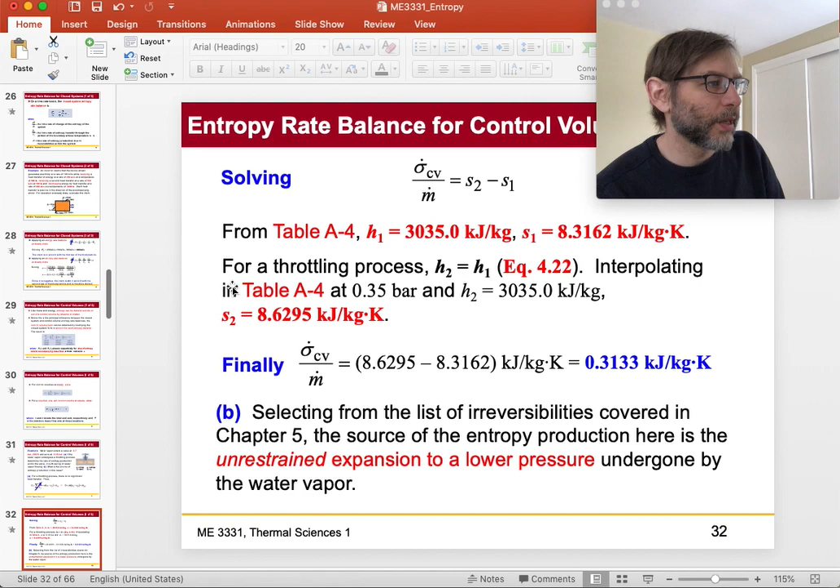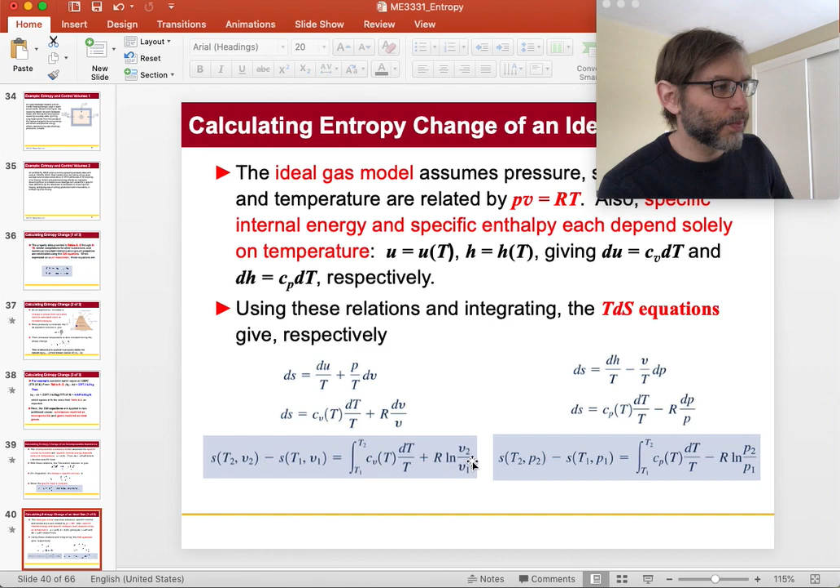Entropy change for an incompressible substance—you recognize this equation. You might recognize these equations, the Cv dT over T, R ln V2 over V1, which is an example I gave you on the homework assignment. This other one, also for an ideal gas, Cp dT over T, R ln P2 over P1, the pressure correction factor—you've used this before. You've also seen this one, the S naught. This was also in the back of the slides and something we've already used.

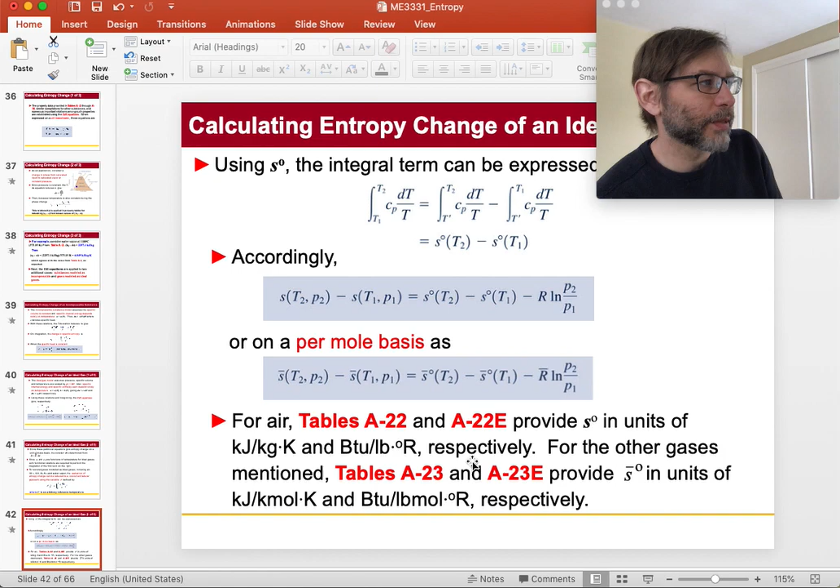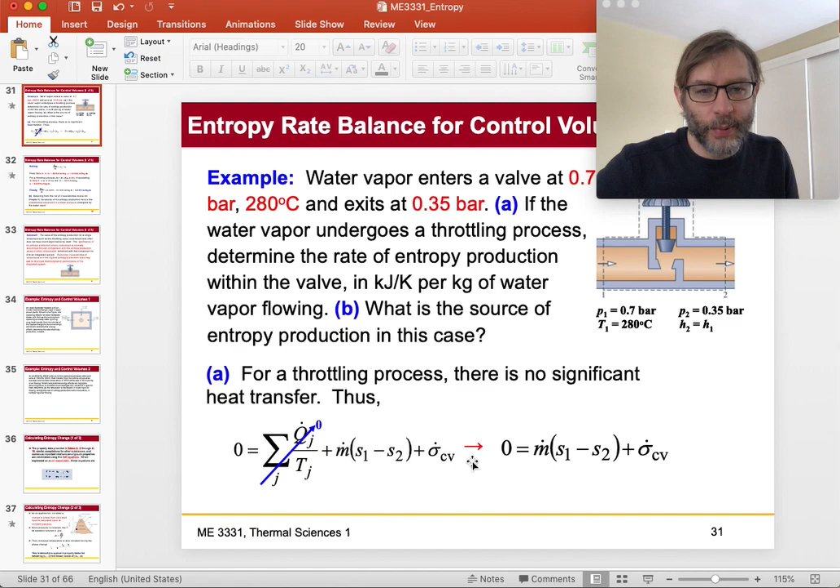So what I'm saying is the rest of the slides really aren't that new. There's some new stuff we will cover, but I'll just blow through them in Wednesday's lecture. Today, the most important thing we cover is the entropy rate balance for a closed system and for a control volume. It's not that difficult to extrapolate what we've been doing for closed systems into control volumes—not a huge leap.

On a time basis, we start by putting the entropy equation, or entropy balance, into a rate expression, just by saying dS/dt—dividing everything by dt. So big dS/dt is equal to the sum of the heat transfer rates, Q dot J, in kilowatts, over some temperature at which those heat transfer events occur on the boundary, plus sigma dot, which is the rate of entropy production—the entropy generation of the system.

Production of the system going out to the environment — that's the time rate of entropy production due to irreversibilities within the system. So this is the rate equation.

It's very similar to just the non-rate equation, it's just divided by dt, because the q dot and the sigma dot are just the rates in and out of the control volume.

So here's just a simple example, entropy rate balance for a closed system. This is an example that's in the slides that you can work through yourself if you want.

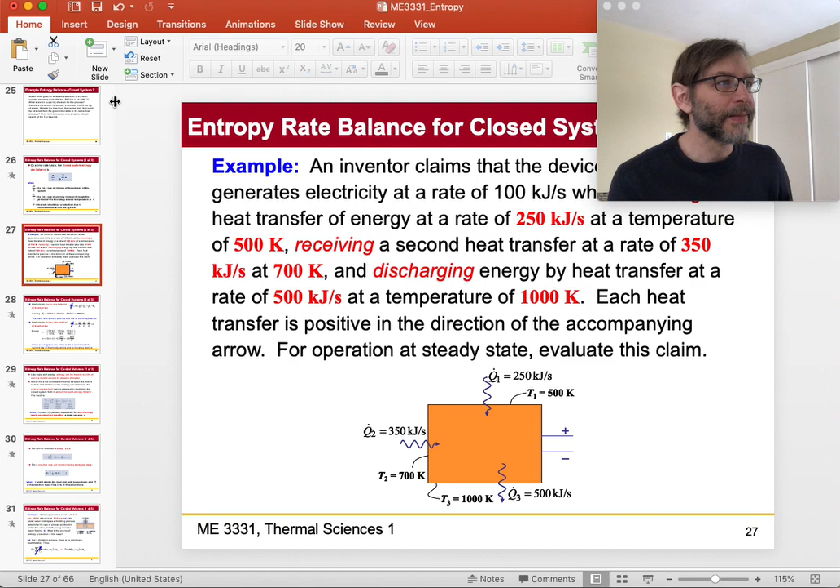Each heat transfer is positive in the direction of the arrow for operation at steady state. Evaluate this claim. Essentially what they're trying to say is that the device this inventor has created generates 100 kilowatts of electricity by receiving and rejecting some heat.

First off, you have to think to yourself, if you're the patent examiner looking at this, you go: well, okay, so the box takes heat in, rejects heat, and also produces work. So you'd say, just from the outset, it doesn't violate the Kelvin-Planck statement, right?

Everything is fine - well, I wouldn't say that it doesn't. You can't really say that it totally violates the second law, but it doesn't violate the second law in principle. It certainly doesn't violate the first law, and you can check that.

You can check that because you have all the heat streams. Just from the top of your head, we can look here and see that it's 250 kilojoules in, 350 kilojoules in, so there's 600 kilojoules per second - 600 kilowatts of heat going into this magic device, engine, fuel cell, whatever it is.

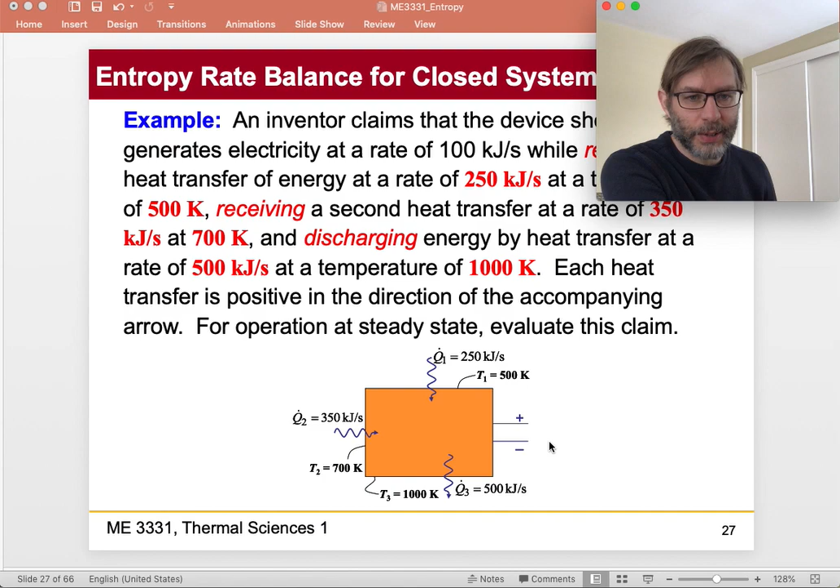So now we want to evaluate whether this system is possible based on the second law. Okay, let's do it. So entropy balance for the closed system.

Now we're going to do the energy balance, and clearly this is in accord with the first law of thermodynamics. We already talked about that, we did that in our head so we didn't need to write it down. It's clear that it all works.

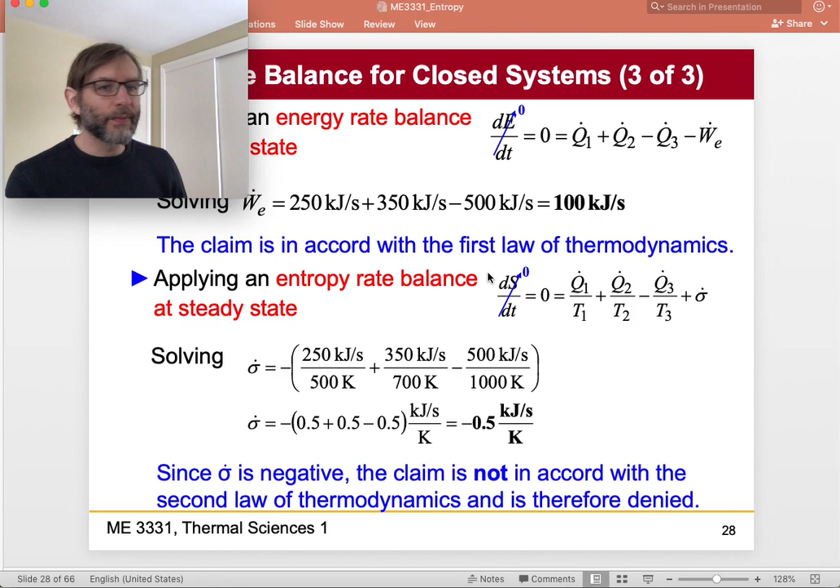Applying an entropy rate balance, then you can say ds/dt equals 0 equals this thing plus some generation. So just think that it's a cycle - I guess they say it was a cycle?

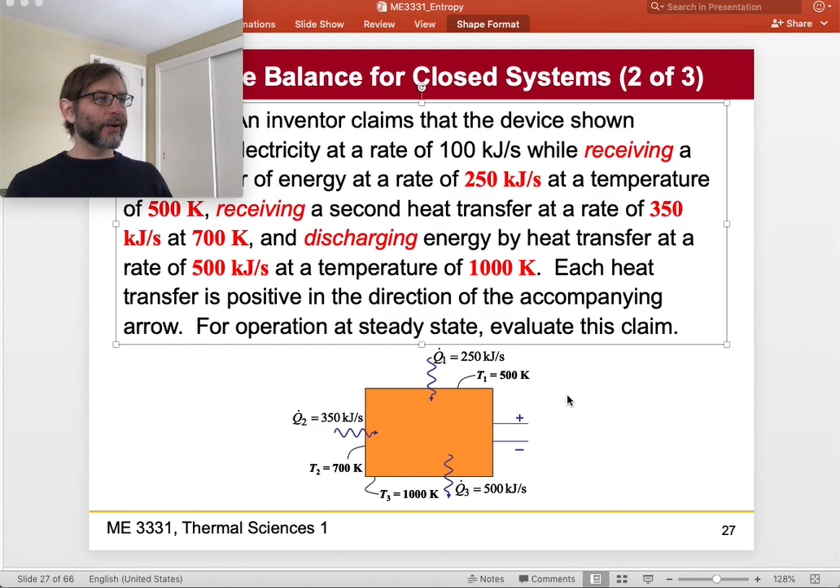Hold on, a device shown - I guess they're just assuming that it's a cycle, that it starts and ends at the same thing. I don't know, that's kind of interesting. We're assuming that it's a cycle. I don't know, is that really what it is? But okay, so say it's a cycle.

So then ds/dt is 0 because it's starting and ending at the same state within whatever thing it's doing in there with all the heat transfers at these different temperatures.

You notice that you're just accounting for the heat transfer here, not the work, and then you get a sigma. You solve this for the sigma: 250 over 500, 350 over 700, 500 over 1000, and you get negative 0.5 plus 0.5 minus 0.5 kilojoules per second per K, giving you negative 0.5 kilojoules per second per K.

Uh-oh, bummer. So this means that essentially they're extracting too much work for how much heat transfer they're putting in, because you have negative 0.5 kilojoules per second per Kelvin. So it's a violator of the second law. It says, since sigma dot is negative, the claim is not in accord with the second law of thermodynamics, and therefore is denied.

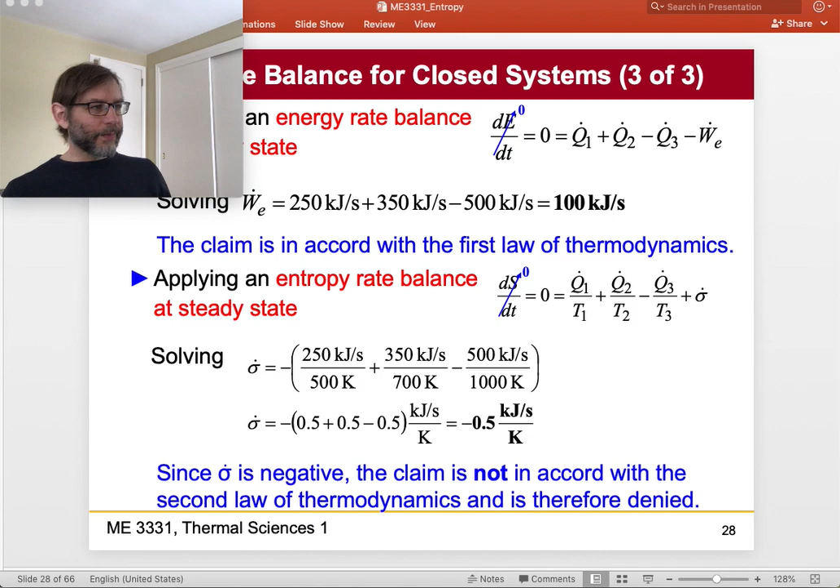So it doesn't necessarily violate the Kelvin-Planck statement, right? It definitely doesn't violate the first law, but it violates the second law because it's extracting too much work for the amount of heat that it's transferring in and out. And that's what's going on here. So yep, that's the way it is. Rejected. Okay, next.

Now this, of course, the rate equation leads us to the entropy rate balance for control volumes. It's 5 slides here. I'm going to go through them quickly, and then we're going to do an example problem or two if I have time. So what we've got here is, like mass and energy, entropy can be transferred into or out of a control volume by streams of matter.

Since this is the principal difference between the closed system and the control volume entropy rate balances, the control volume form can be obtained by modifying the closed system form to account for such entropy transfer. Just like you could have energy transfer across the boundary, you can also have entropy transfer across the boundary.

So you have to take into account the change of entropy for the control volume itself, dS/dt for the control volume, that's why they put the little CV here, equals the sum of the Q dots over the temperatures at which they occur, which is the same as what we've been dealing with. Now just like when we did the energy rate balance, we have to account for the entropy rates of entropy transfer.

So the sum of m dot i times s i, minus the sum of m dot e times s e, so the entropy coming in, the entropy going out, plus the entropy rate of production.

Now here's something interesting. Remember how when we developed the control volume form of the first law, we had to account for the enthalpy because we had flow work. Remember the flow work, which is the pressure on either side? Good thing to remember for your exam, by the way. So in this case, we have s i and s e, which is the exact same as what we had before.

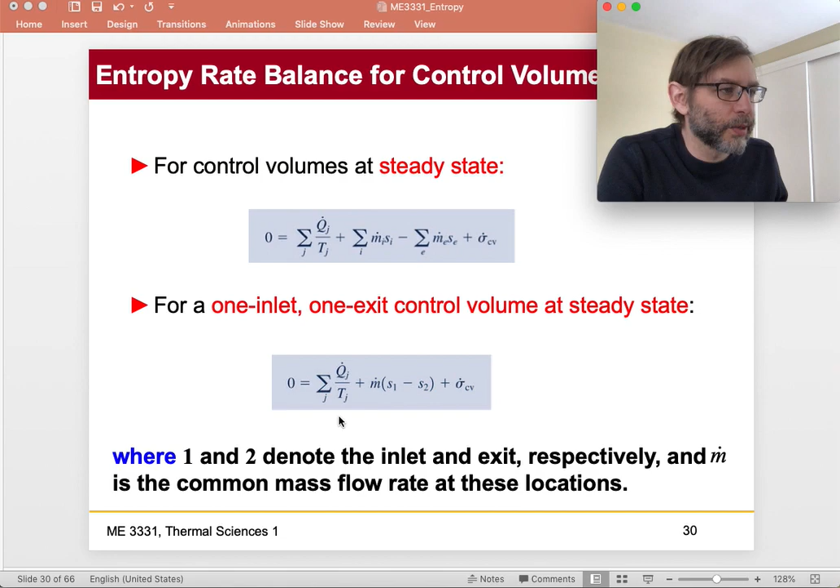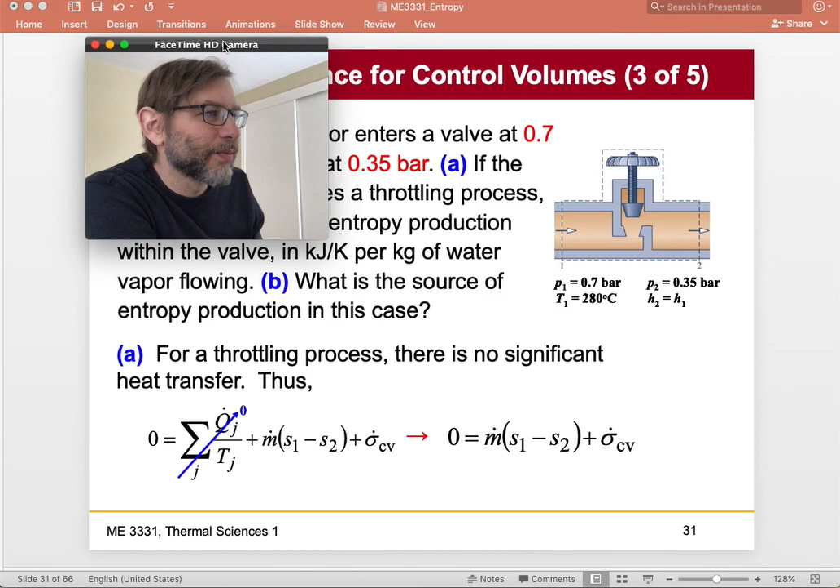Water vapor enters a valve at 0.7 bar, 280 degrees C, and exits at 0.35 bar. It makes sense, it's a valve, it's lowering pressure. If the water vapor undergoes a throttling process, determine the rate of entropy production within the valve in kilojoules per K per water vapor flowing.

Well, first of all, it's a throttling process, so there's no heat transfer. They're assuming essentially for a throttling process it's adiabatic. It didn't say that in the problem, which is a little suspect—I would mostly tell you whether it's adiabatic or not. But in this case they assumed adiabatic, and they got rid of the Q term, where it goes to 0. You're left with m dot S1 minus S2, which is the inlet and outlet, and the sigma dot, which is the entropy production.

So let's see what happens here. There's no heat transfer. Where's the entropy going? Sigma dot over m equals S2 minus S1. You find out if you look in there, you can look at the quality.

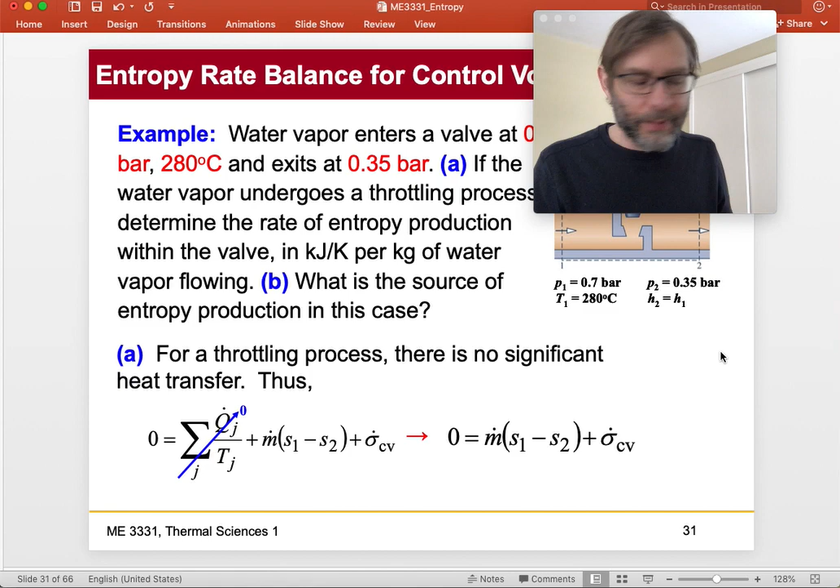They have some comments too, beyond my cheesy comments about the end of days here.

Comment: the value of entropy production for a single component, such as a throttling valve considered here, often does not have much significance by itself. The significance of the entropy production of any component is normally determined through comparison with the entropy production values of other components combined with that component to form an integrated system.

So reducing irreversibilities of components with the highest entropy production rates may lead to improved thermodynamic performance of the integrated system. That means if you put this valve in some system and you say, oh wow, I'm losing a lot of pressure in this valve, I could be recovering that pressure in a turbine, then probably it'd be better to have a different valve that didn't drop as much pressure, that had less throttling loss.

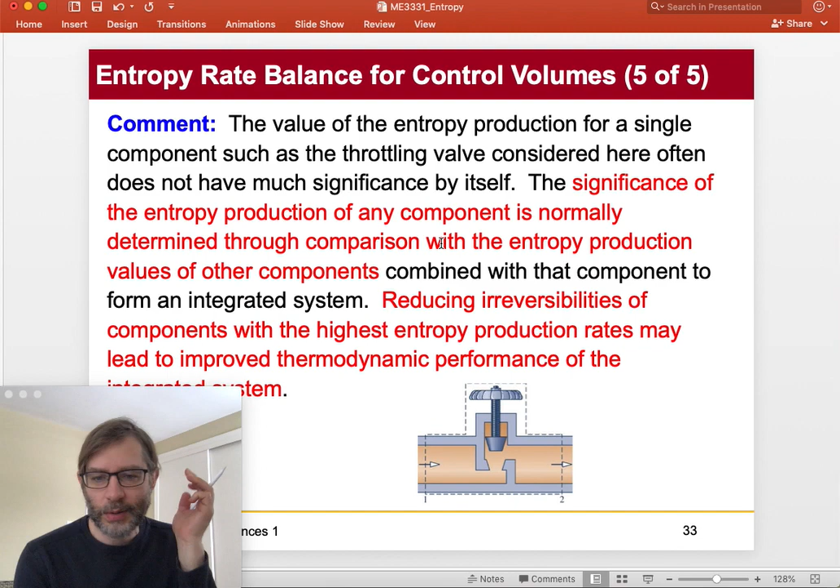Valves I don't really think very much about, but you think about a turbine and you have a lot of entropy production in a turbine. You want to make sure you're accounting for that, and a second law analysis would find those irreversibilities. So looking at all the sigma dots of all the different components within a steam power plant, for example, could help you identify where the highest rates of entropy production were, and therefore find the most inefficient systems that you have.

All right, so fair enough. Let's go to the next slide where now we're on to our example problems. Good, that's fine. So we can spend the rest of our time doing some examples on these things that help you guys out.

So the first example, let's see, I have two examples. I have one with steam and one with air. Okay, so the first one is entropy and control volumes 1.

An open feed water heater is a direct contact heat exchanger used in vapor power plants. Shown in the figure are the operating data for the open feed water heater with H2O as a working fluid, operating at steady state, ignoring stray heat transfer from the heat exchanger to its surroundings. So that's always a good sign to call it adiabatic, right?

And ignoring kinetic and potential energy effects, determine the rate of entropy production in kilowatts per K. So find the sigma dot. All right, let's do this problem.

An open feed water heater is a device that is typically used. Essentially when it's open, it means it's not like a heat exchanger, it's a mix. They're mixing - taking a stream here at 3 bar and high quality, 3 bar and low, this is pretty high quality stuff, 3 bar 0.92, and you're taking a little bit of that high quality steam and mixing it with water, and coming out with some preheated saturated liquid at the same pressure. Notice that the pressure isn't changing with this system - each of the streams has 3 bar.

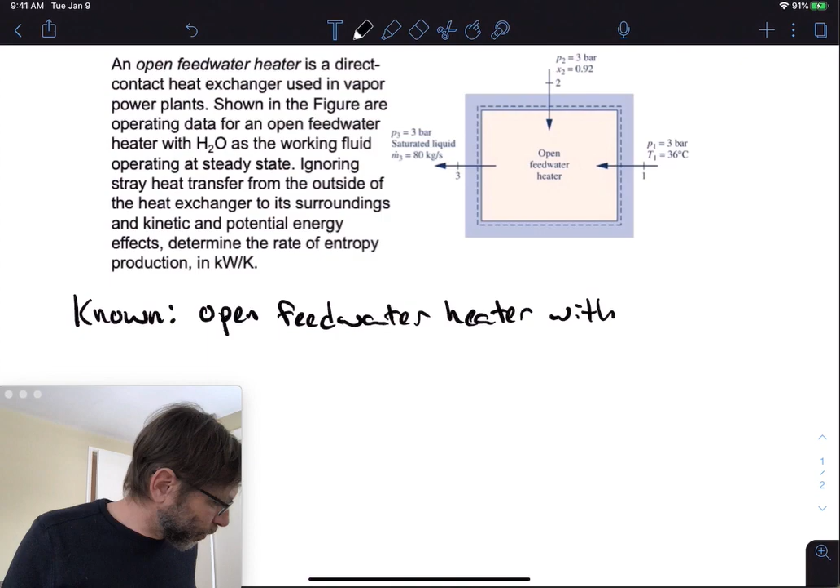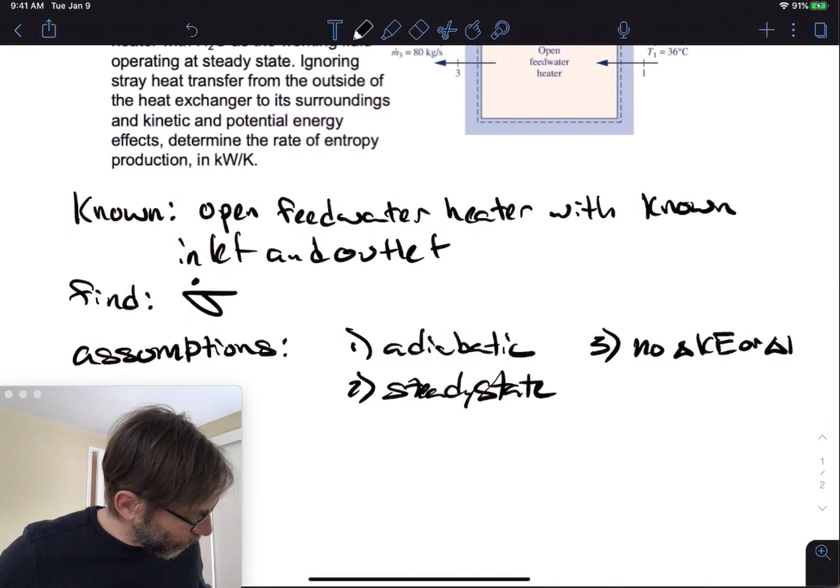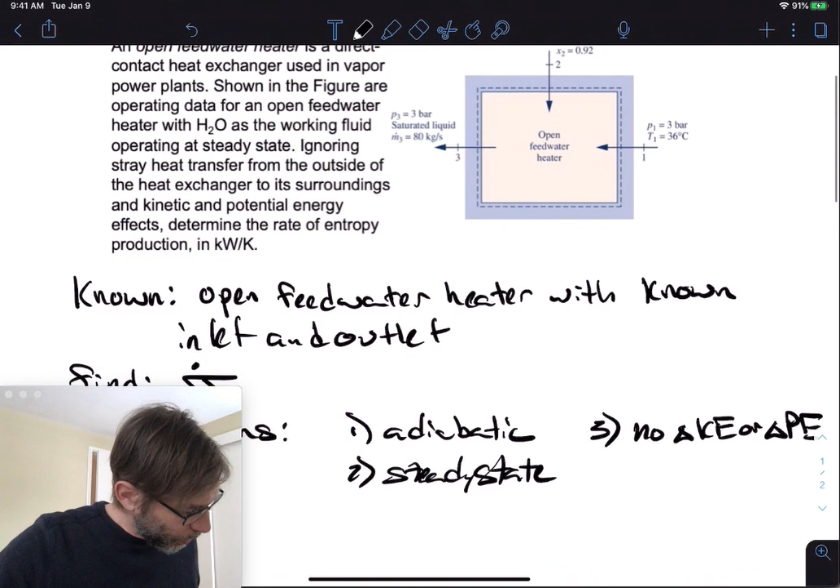First of all, we're assuming that it's adiabatic. We're going to assume also that it's steady state. What else? Three, we're going to assume no delta KE and PE - there's no high velocity, or the thing's not going from very high altitude. And steady state, and water is the working fluid.

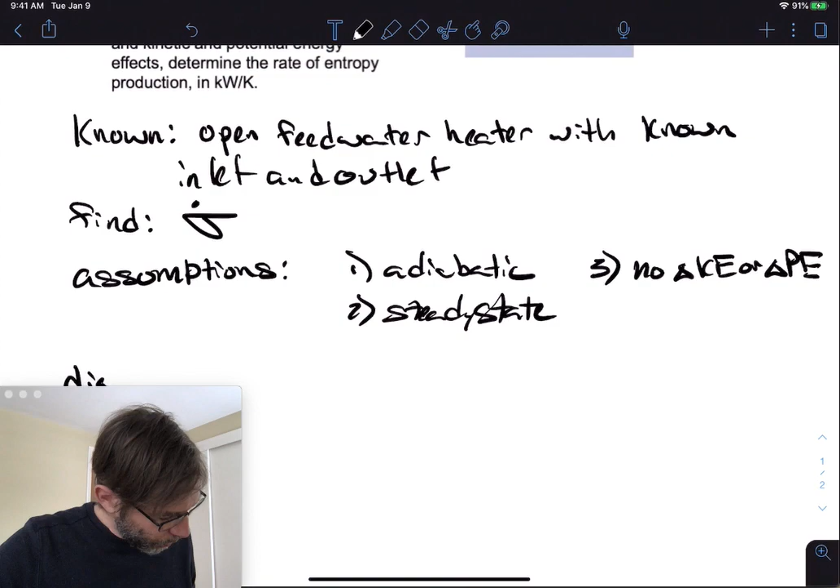Okay, let's make some diagrams here. I'm just going to use the diagram that we have - this is my thermodynamic system, so I'm not going to redraw it. We have the states, as you can see here. And we're going to call this my control volume, CV. All right, so I did that part.

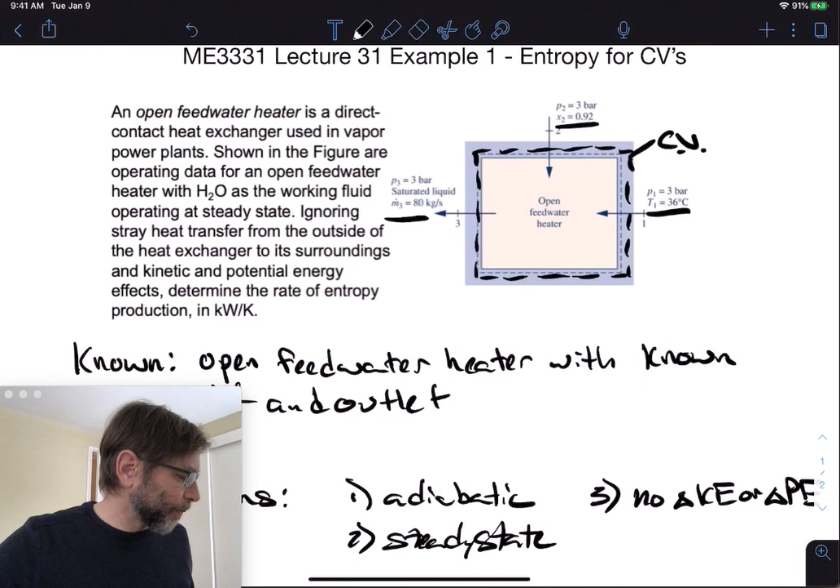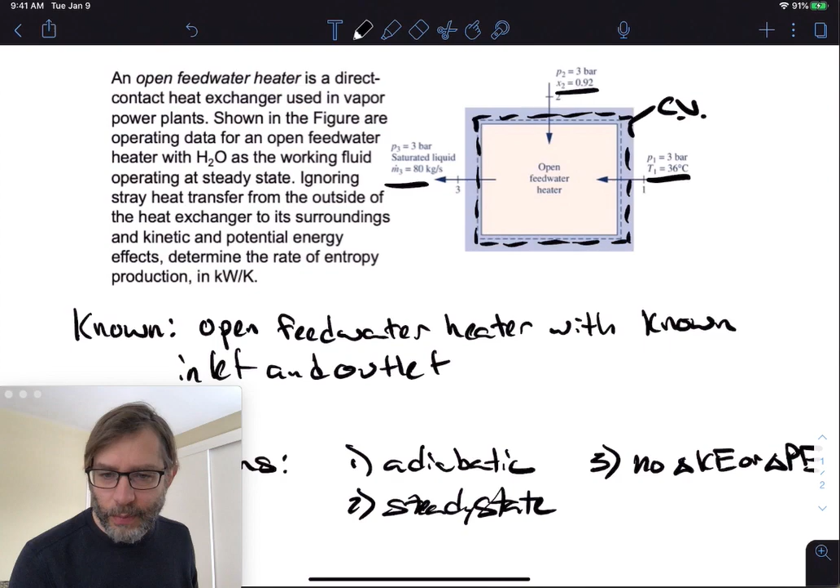But the other diagram we always like to make is the TS diagram. So let's make the TS diagram - maybe I'll just make it here, and I'll change its location in a minute if I need to. So the TS diagram is here. Of course we have the vapor dome, and because we have water, saturated water, notice it gives us saturated liquid. So when it says stuff like that, you know it's got to be steam - you just put the vapor dome in, okay? You know it's a vapor dome.

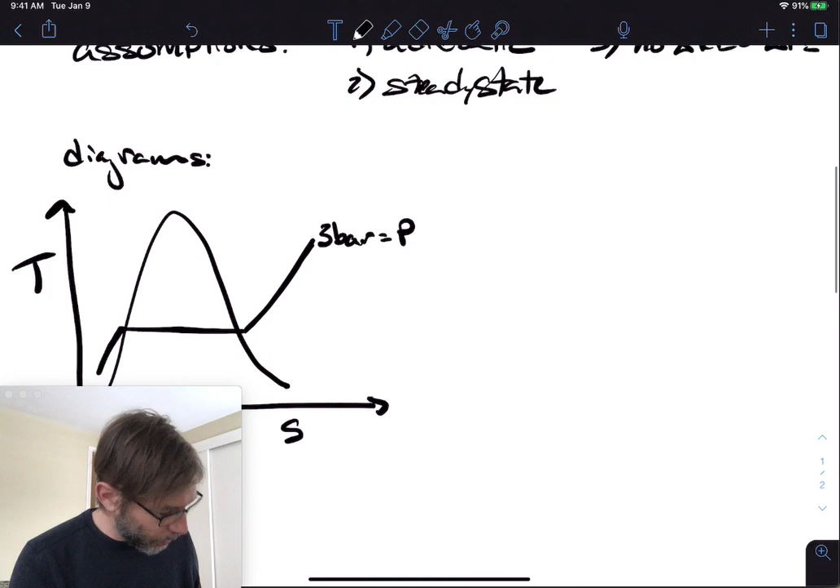So everything's operating at the same pressure - that's nice. So we have one isobar at 3 bar, right? Everything's operating along this line. So we know that state 3 is saturated liquid - this is state 3, there on the left.

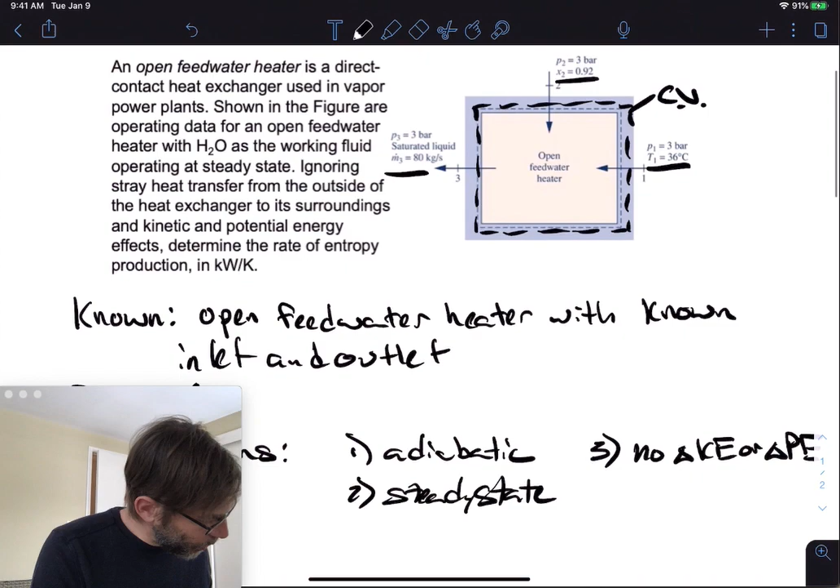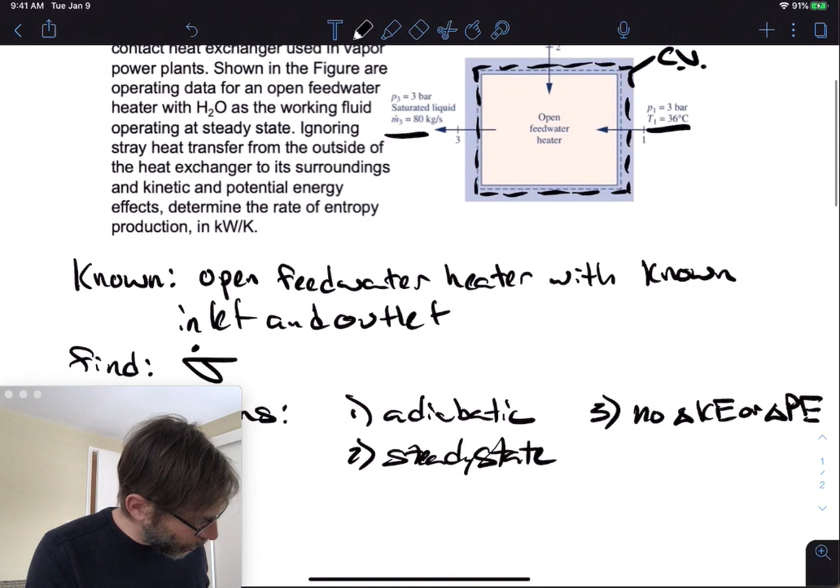Now state 2. State 2 is the stuff coming in with 0.92 quality. And state 1 is 3 bar, 36 degrees C, so that must be like down low, over here somewhere. So state 1 is low quality water, essentially - just water at relatively high pressure, at 36 degrees C. That's still pretty hot, but it's close to room temperature, kind of like lukewarm water.

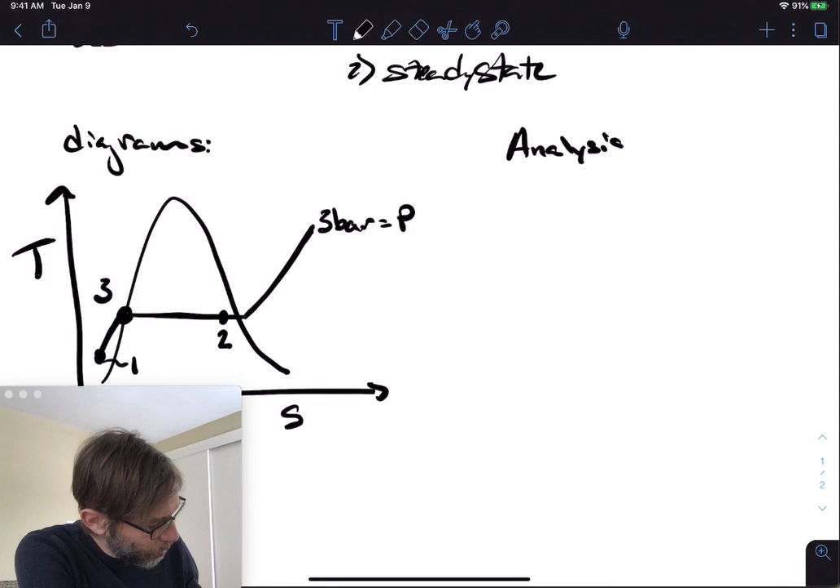So we have state 1, 2, and 3. We have 2 plus 1 going to 3. We're making saturated water that's ready to go into a boiler - that's why they call it a feed water heater. So the feed water heater is just ready to go: it's water where the sensible heat is already taken up. The sensible heat is what heats up the water to get it to the boiling point, and then once it's there, it boils a lot better inside your boiler. That's why they use the open feed water heater concept in a power plant.

So we're going to assume here that for state 1, H1 is equal to HF at 36 degrees C, which if you look in the tables, is 150.86 kilojoules per kilogram.

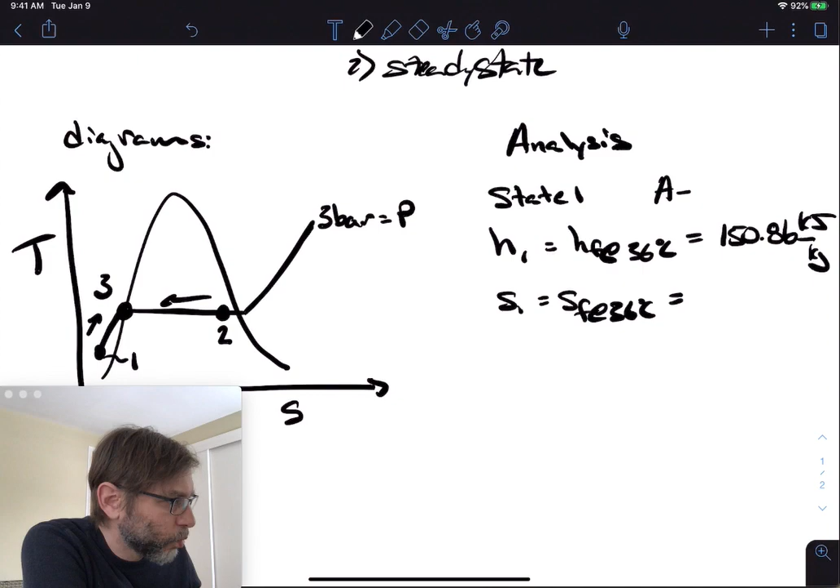S1 then is also SF at 36 degrees C from the table, I don't know - I think it's table A2, I think it's table A1. Oh man, I don't know. Let me just go check it out. I don't want to waste time, but I don't want to also say something wrong. So I believe we're talking about table...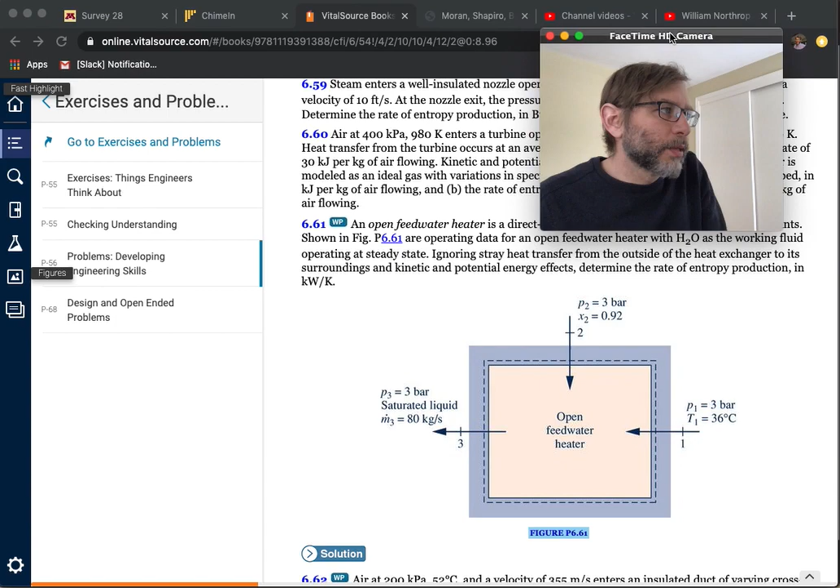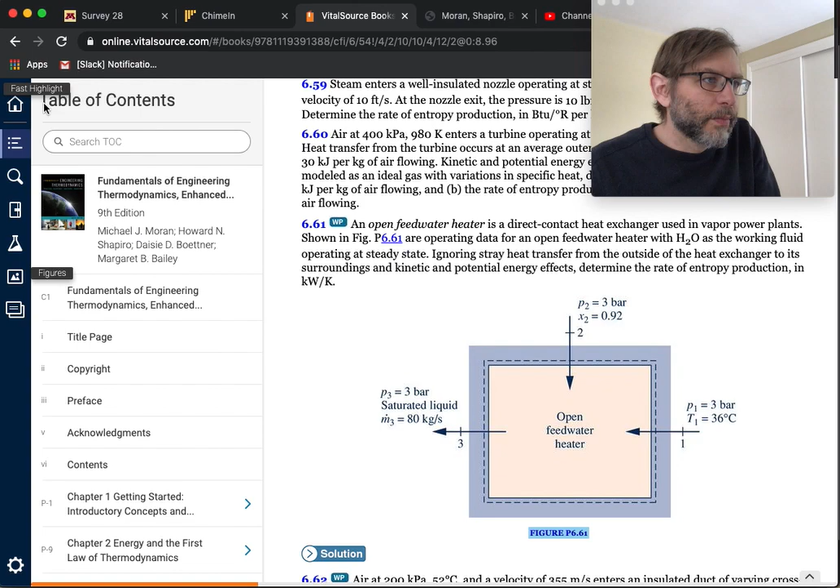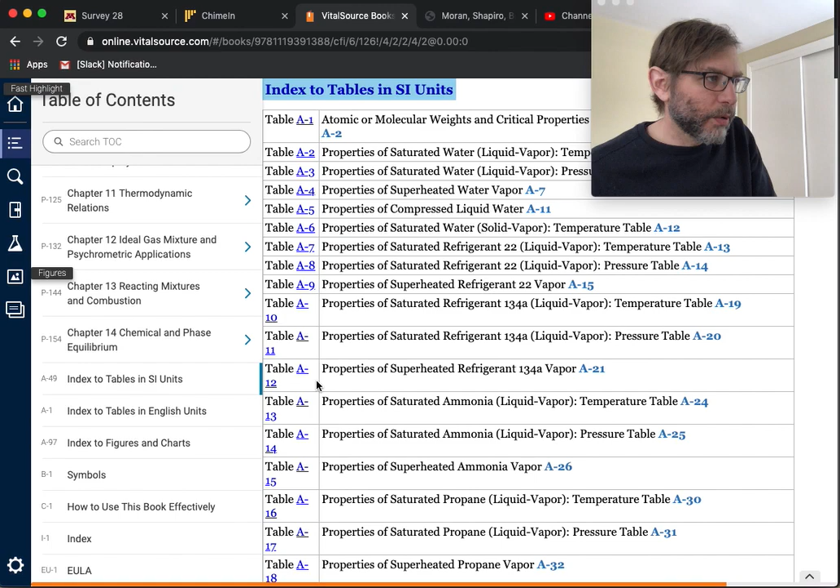Here's the textbook. Okay, so the textbook is here, I'm moving myself over here. And then we'll find out what table we're looking for - the temperature table. Bear with me here, get to it. SI tables. Here we go - temperature tables, table A2. 36 degrees C is right here, so yeah, you can see it's right here. Table A2, 36 degrees C is right - it's not letting me highlight it, but whatever, you can see it here where my arrow is.

Okay, so 36 degrees C, this is table A2, the temperature table for water, and then SF at 36 degrees C is 0.5188 kilojoules per kilogram K. Okay, so then we've got that.

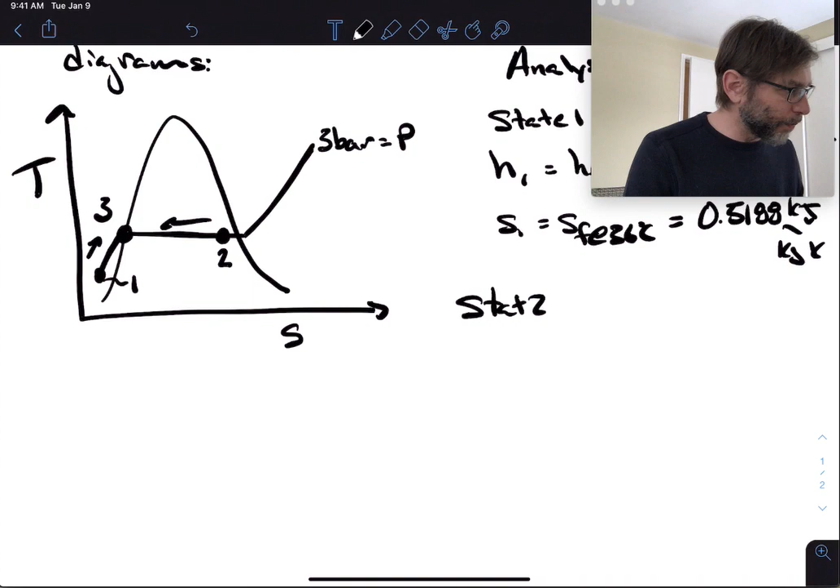Since we have all the states, we can just look at all the states, right? I think we know what they all are. State 2, we know state 2 is saturated, high quality saturated steam.

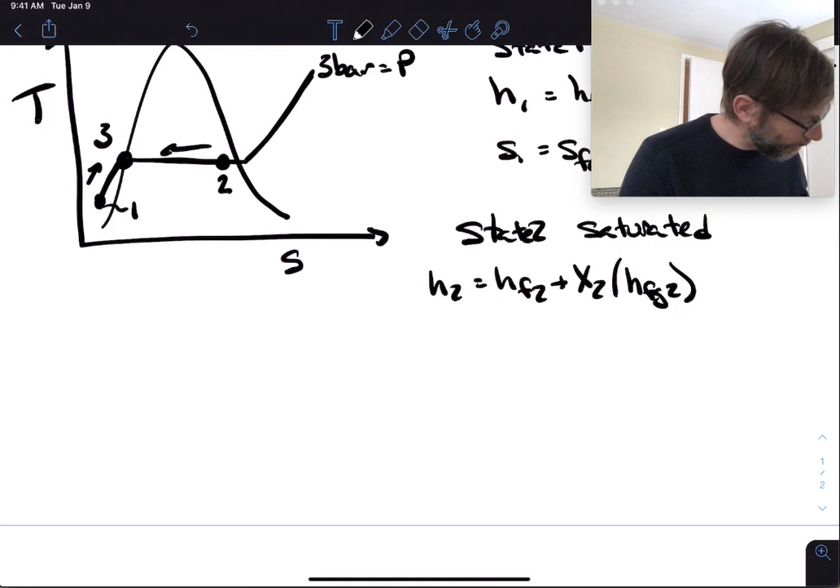We have H2 equals HF2 plus X2 times HFG2, and this is evaluated at the pressure that we have, at 3 bar. So we're using table A3 in this case because we're using the pressure table. And we know that S2 also is SF2 plus X2 times SFG2, which is the difference between SG and SF.

So if you do these and plug in the numbers, which I'm going to - well, maybe I will, since I have the numbers. So H2 equals 561.5 minus 0.92 times 2725 minus 562, which is what we have there. And this is equal to 2552.2 kilojoules per kilogram.

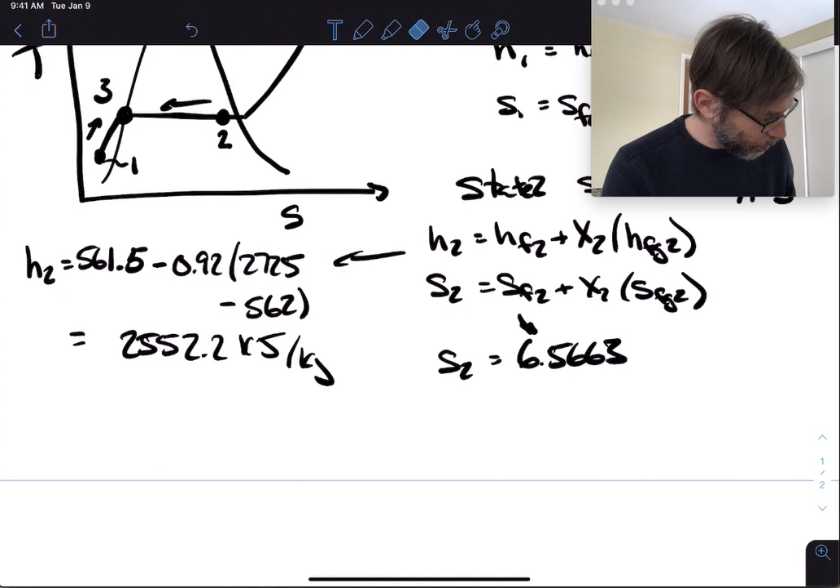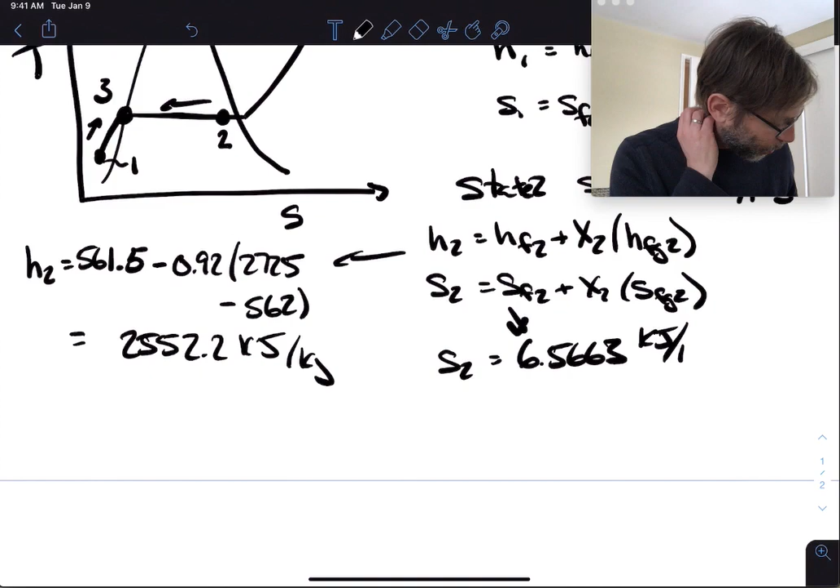And then S2, I'm just going to give you the number, you can look this up too - this is 6.5663 from this equation, kilojoules per kilogram K. All right, so we have those.

Now let's do - okay, so then let's go state 3. I find it sometimes, if you know what the thermodynamic states are, just look everything up in advance and then solve the problem, so you don't have to go flip back and forth to the book or flip back and forth into the computer notes to find these numbers.

Just get everything out of the way. So state 3 is saturated liquid, state 3 is saturated liquid. So H3 equals HF at 3 bar, which is 561.47.

And S3 equals SF at 3 bar from table A3. And you have here something like 1.6718 kilojoules per kilogram.

Okay, so now we've got all the numbers we need, so we apply the mass and energy balance. Let's see what we're going to do - mass first. I mean, it's pretty obvious: m dot 1 plus m dot 2 equals m dot 3, right? Because the change in mass - so dm_cv/dt equals 0 because it's steady state.

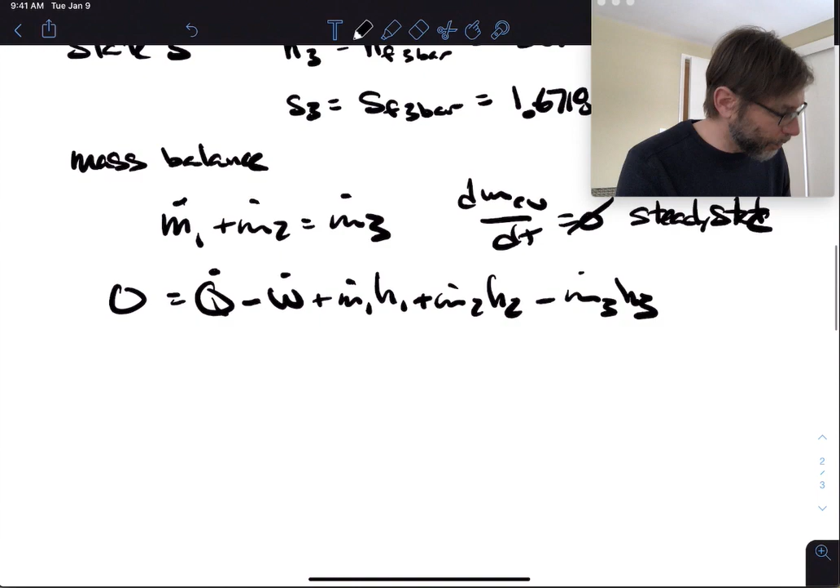And so we know that we're going to end up getting all these terms go to 0. This goes to 0 because it's adiabatic, as we said. And there's no shaft work, so the work goes to 0. And so you're going to end up with an equation that looks like the following.

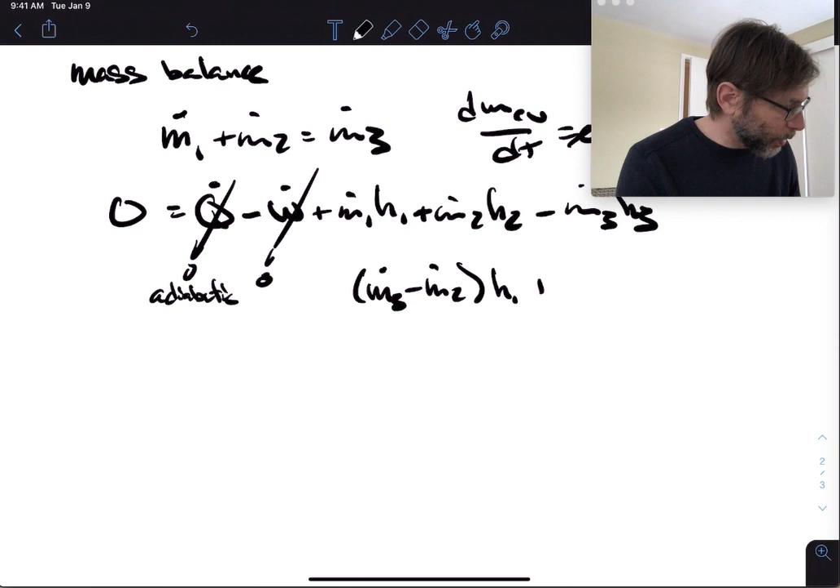m dot 3 minus m dot 2, h1 plus m dot 2 h2 minus m dot 3 h3 equals 0. So now we've got a bunch of m dots in here, 2 and 3. We got rid of m dot 1. So now we have the combined mass and energy equation.

And now we're at the point where we don't really know the entropy production unless we do the entropy balance, of course. Let's see, can we find one of the mass flow rates? Yes we do - oh, we know m dot 3. So we can find m dot 2.

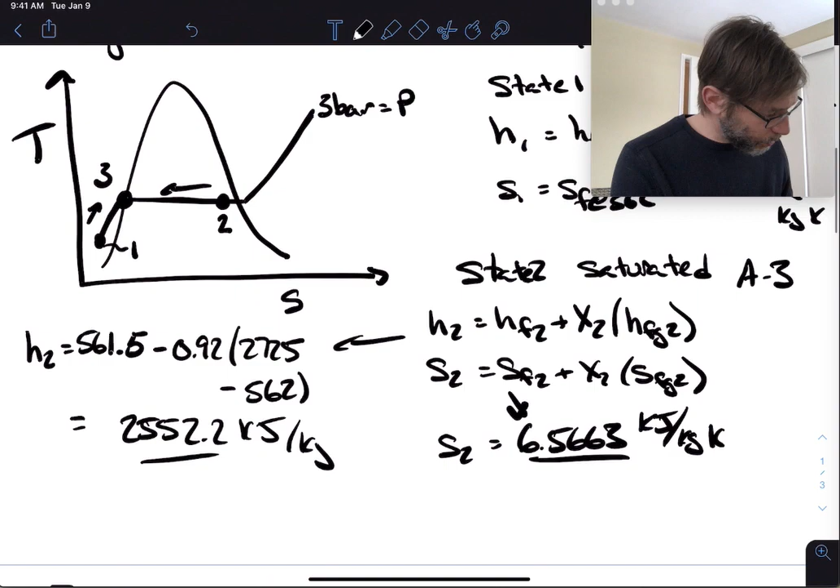So let's find m dot 2. Or m dot 1, I guess. Or we can find any of them - m dot 2 and m dot 1. m dot 2 is equal to m dot 3, and then you just do algebra here, h3 minus h1 over h2 minus h1, and you end up getting, so 80, and then you have 561.5 minus 150.9, which is h1, and you get 2552 minus 151, which is the other H's that you needed, and you end up getting 13.68 kilograms per second.

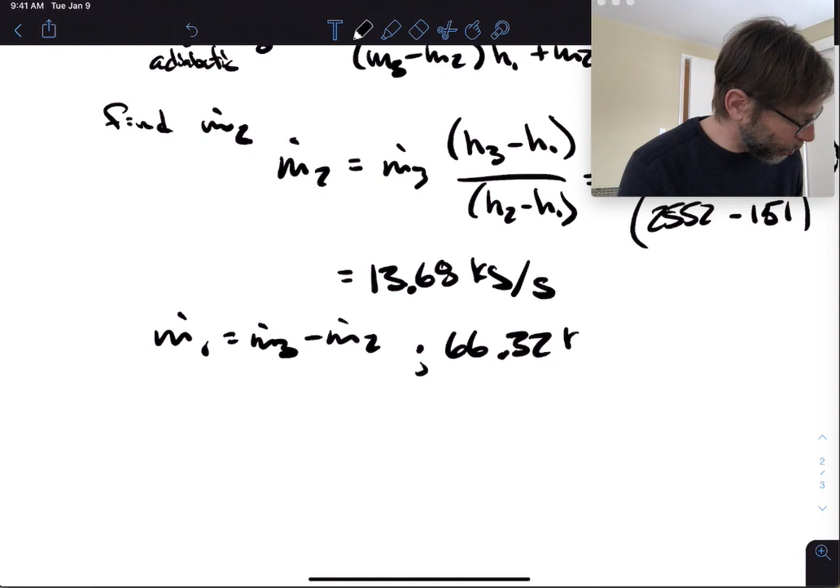And then m dot 1 is equal to m dot 3 minus m dot 2 by mass conservation. And this ends up being 66.32 kilograms per second. So now we have mass flows. We've got everything we need here.

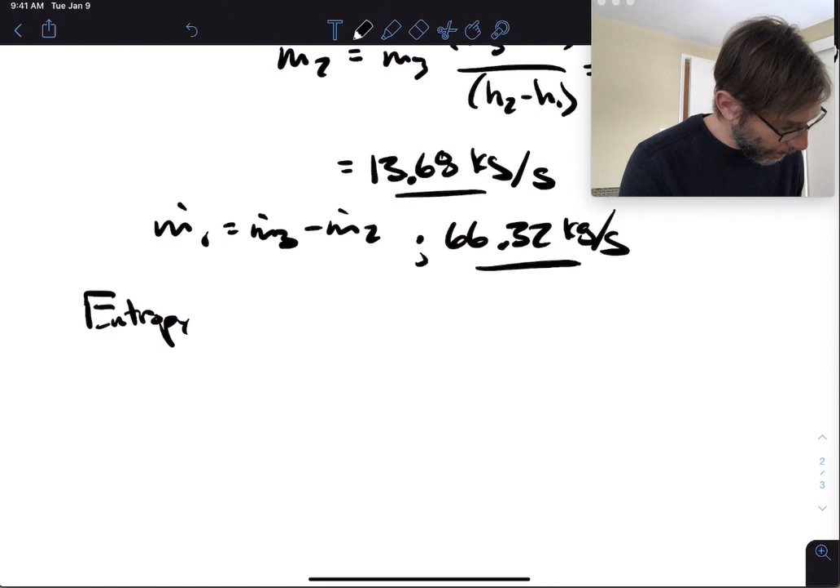So essentially, the entropy balance - we still don't know what the entropy balance of this thing is, but we know that 0 is ds/dt, right? Equals 0 because it's steady state. Let's see, do we have any q? We have no q over T. dq over T goes to 0 because it's adiabatic.

Plus m dot 1 s1 plus m dot 2 s2 minus m dot 3 s3. And we know everything - oh, plus of course the sigma dot, which is what we're trying to find. And so sigma dot is equal to m dot 3 s3 minus m dot 1 s1 minus m dot 2 s2. And we know all of these things because we looked everything up.

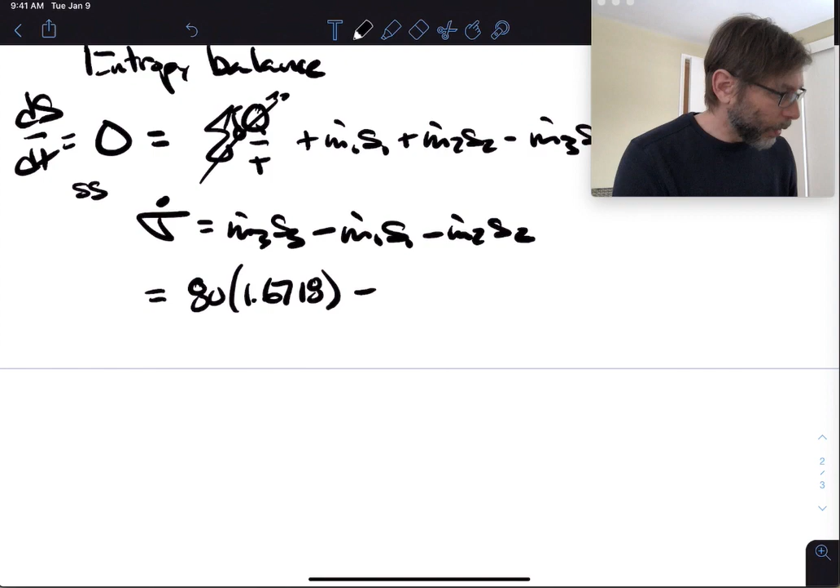So this ends up being 80 times 1.6718, which is S3, minus 66.32 times 0.5188, minus 13.68 times 6.5663. Sorry, I've got some crazy decimal places going on here. But anyways, you get to the idea that sigma equals 9.51 kilowatts per K. So this is definitely irreversible.

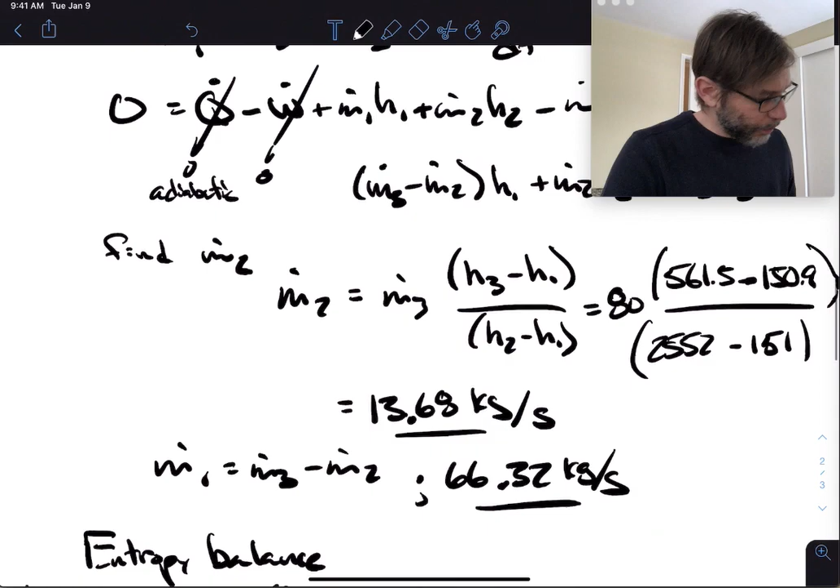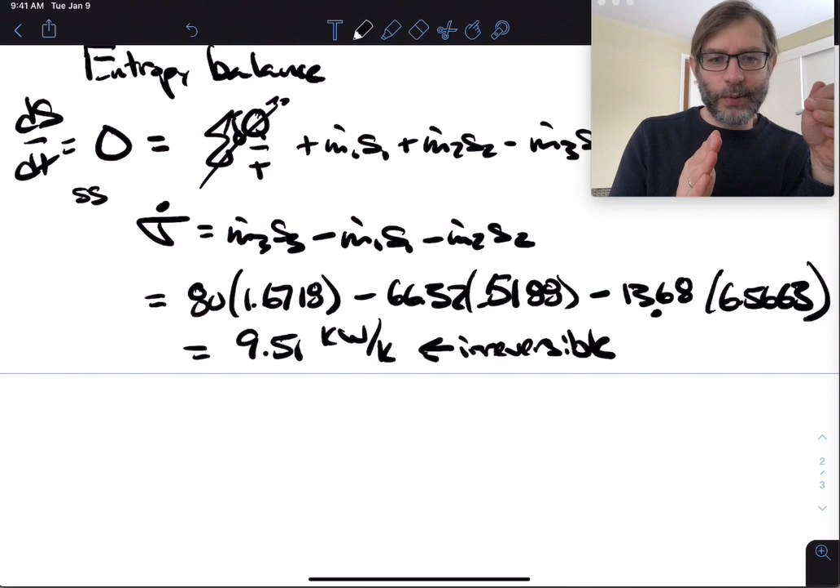Pretty highly irreversible, which I guess we know - these pure mixing processes are pretty irreversible, meaning that they're really lossy. They're really easy though from a physical perspective. I mean, all you've got to do is take high quality hot steam and mix it in with some water, and you get yourself some saturated liquid, which is great for the boiler, as I said, for the steam power plant. So anyways, this is how you do this problem.

So you can see that we've developed, as I said, it's a two-equation class. Thermodynamics is a two-equation class - I mean, third if you count mass conservation. But really, if you just want to think about it in terms of three equations, all three equations are in this problem. So 1 is here, 2 is here, and 3 is here. These are the three equations that you need for thermodynamics, pretty much. And then the ideal gas law, but everybody knows the ideal gas law. So pretty much you need to know the energy balance and the entropy balance - the big two.

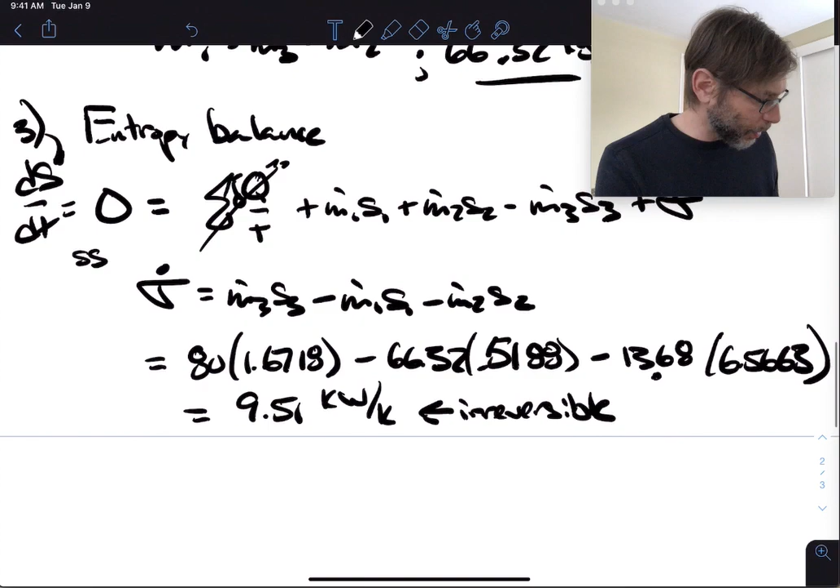Okay, so let's do another example. Let's do one more example before we quit. That example took a good amount of time, so we should get this one done just in time.

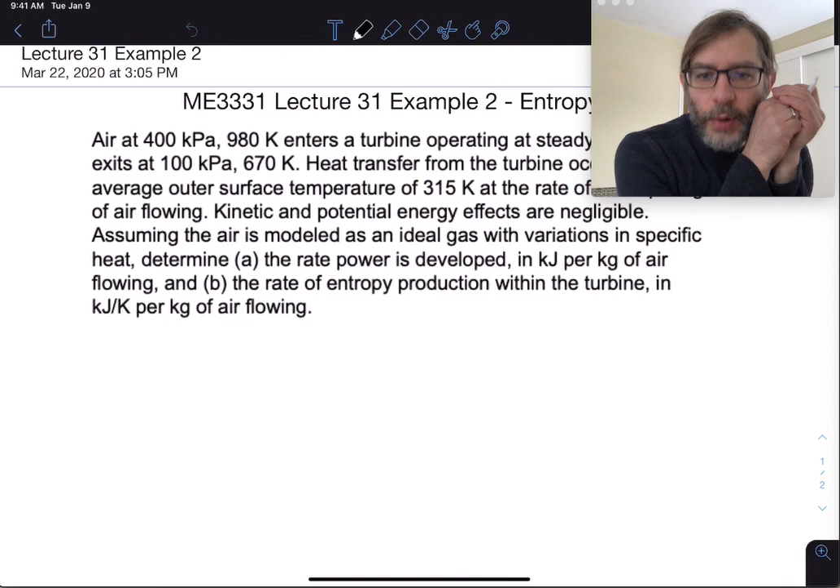Okay, so this one is an air problem. So we have air at 400 kPa and 980 K entering a turbine, pretty hot, at steady state, and it exits at 100 kPa, 670 K, still pretty hot. Heat transfer from the turbine occurs at an average outer surface temperature of 315. So that's your heat loss to the environment coming through the body of the turbine. I mean, you could say the turbine's adiabatic, but probably that's unrealistic.

Especially at these temperatures, at the rate of 30 kilojoules per kilogram of air flowing, they give us the rate of heat transfer out. Kinetic and potential energy effects are negligible. Air is modeled as an ideal gas with variations in specific heat. It specifically tells us we have to consider variations in specific heat, which means we have to use the air tables. Determine A, the rate power developed in kilojoules per kilogram of air flowing, and the rate of entropy production within the turbine per kilogram of air flowing.

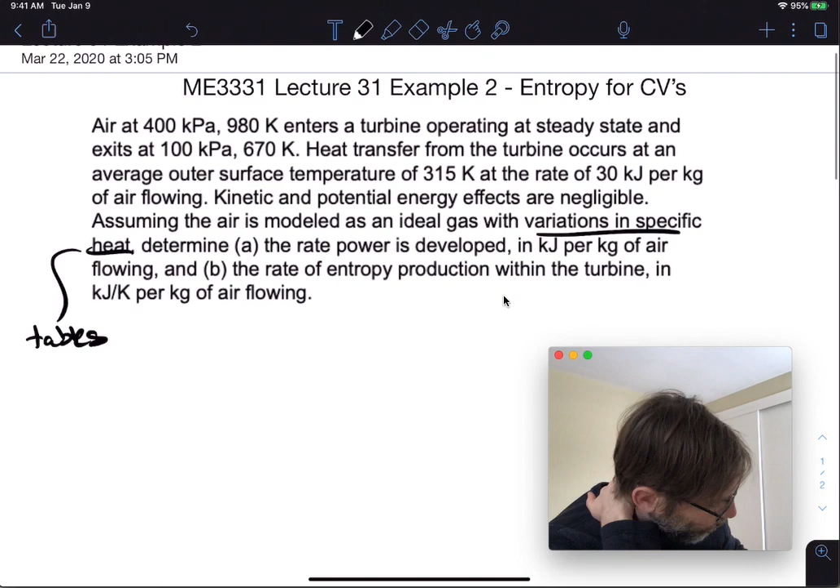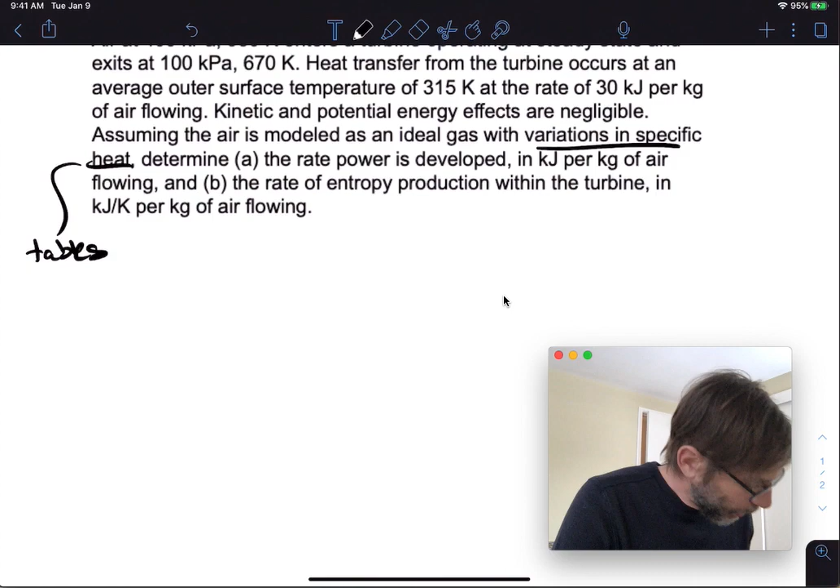All right, so this is a good problem actually, this will give us a lot of things that we need to know. So what's known? We have air, a turbine. We just know it's an air turbine, okay, it's not adiabatic or anything.

Find A, we're going to find the rate power developed, kilojoules per kilogram of air. So we need little w, per kilogram of air flowing, but we need little w, not per second, since it doesn't say per second.

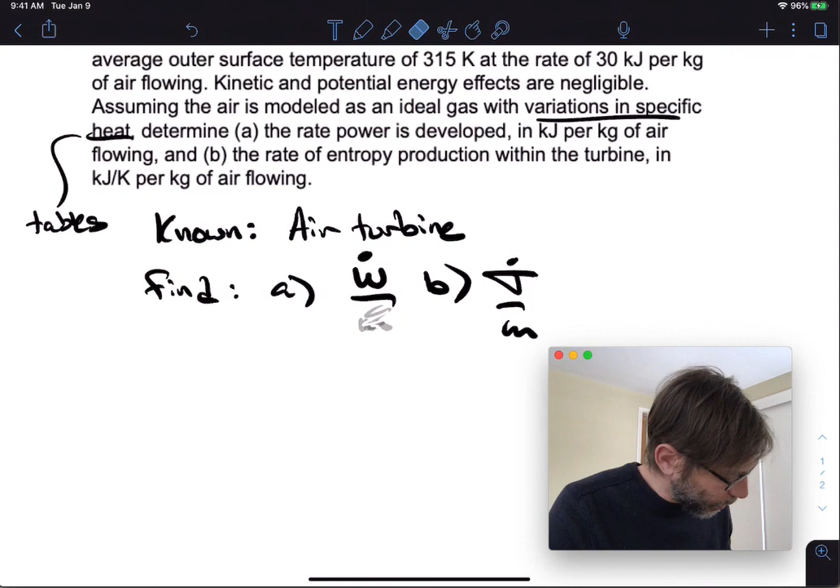The entropy production, rate of entropy production of the turbine per kilogram, kilojoules per K. So we need sigma, not sigma dot. Let me look at my solution real quick. I guess we want sigma dot over m and little work dot over m. Well, little work dot is kilojoules per kilogram second. Okay, fine, let's just do that.

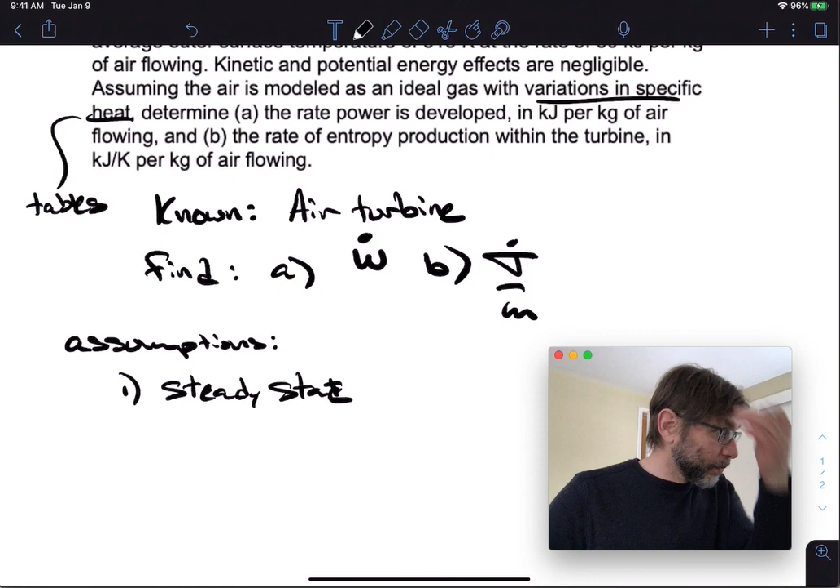All right, so now let's do some assumptions. One, we're assuming this is steady state. Anything else? We have heat transfer, it's not adiabatic. Well, air is an ideal gas, without the constant specific heat, so we're using the table.

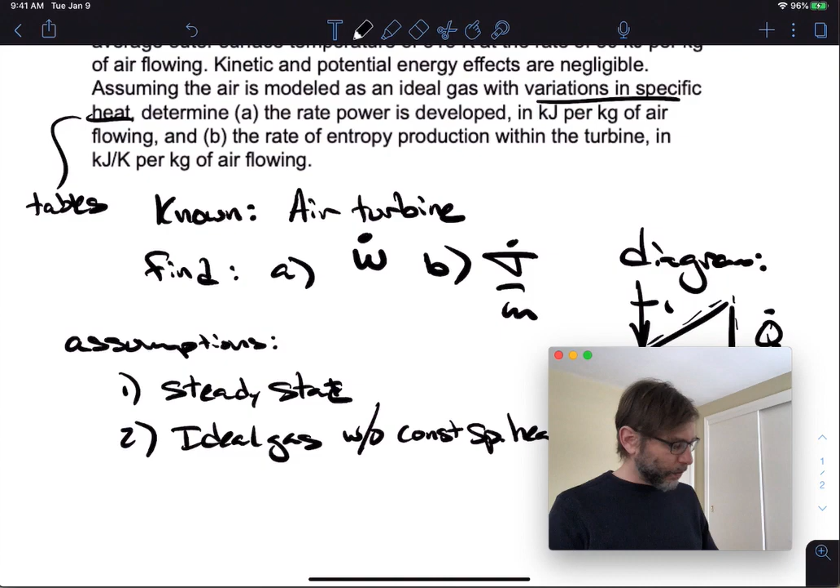Okay, so if you make my diagram over here, it's a turbine. We always draw a turbine like this sort of thing, and we always have stuff coming in and then out. So we have 1 and 2, and we have to make our control volume of course. And we have Q, I guess we're going to call it Q dot, big Q dot. Okay, so we have some heat being lost, heat at 315, at the rate of 30 kilojoules per kilogram of air flowing.

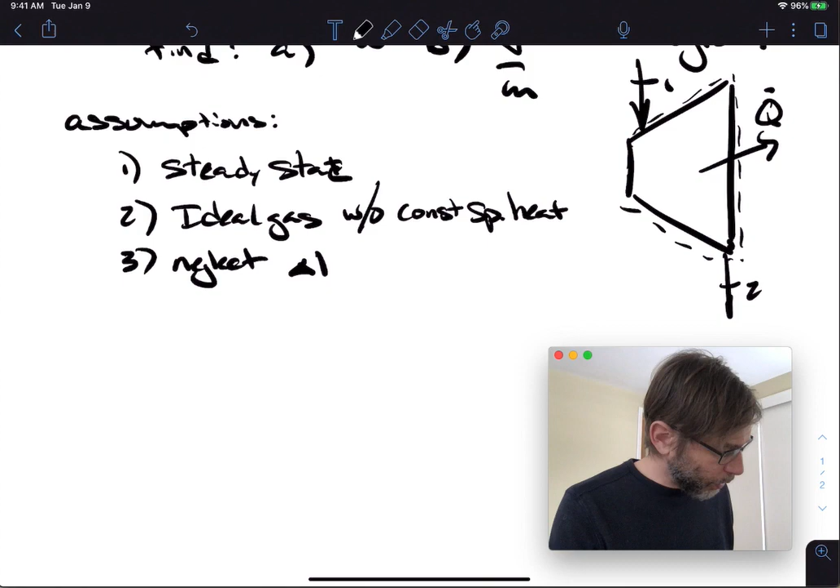Okay, and then let's see, what else? Oh, I forgot that we also have to neglect delta KE and delta PE. Okay, we're neglecting kinetic and potential energies here.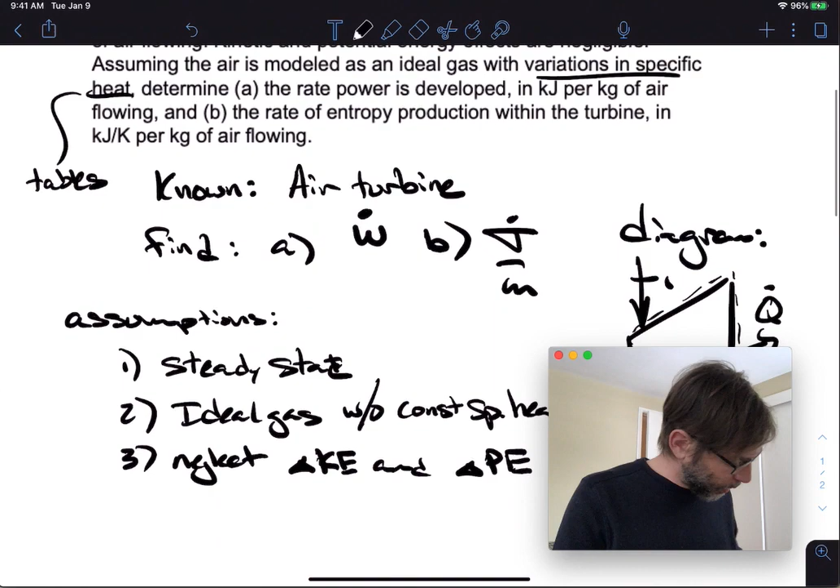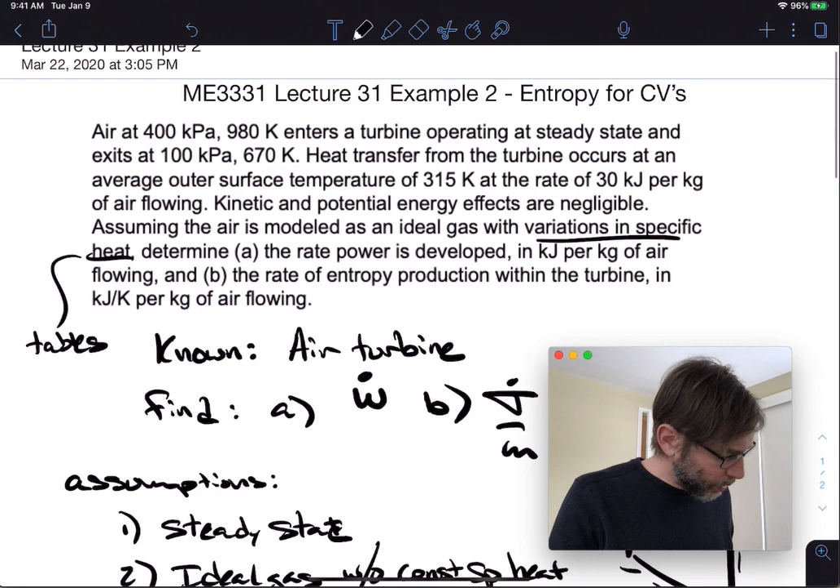Okay, so now let's see what are we going to do. So the analysis, we're given states 1 and 2. What are we given about 1 and 2? State 1 is at 400 kPa, 980 K, and state 2 is at 100 kPa, 670 K.

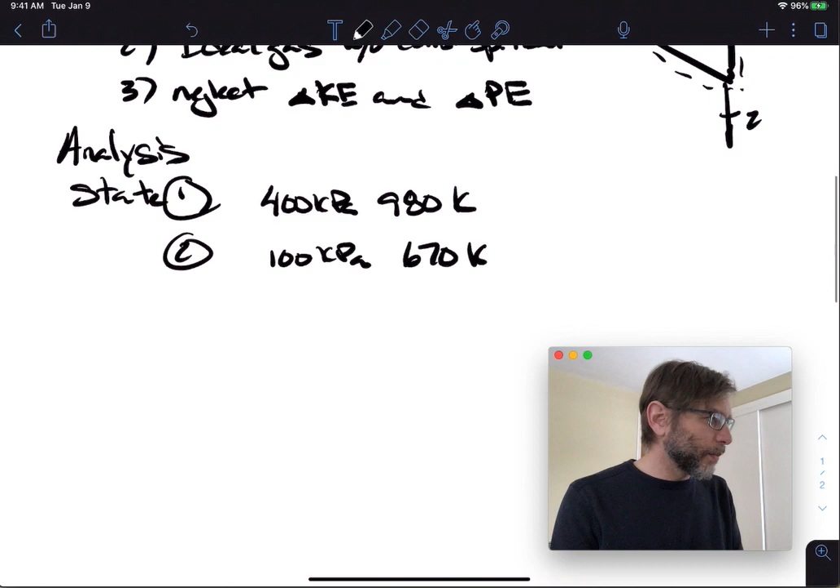So we've extracted some heat from this thing, okay, and some work, so we got work coming out. Of course this thing has to make work, that's the whole point of having a turbine, is to make work.

Energy analysis, so here we go. The first thing we're going to do is the first law. The mass balance is boring, M1 equals M dot, M1 equals M2 equals M dot, one inlet, one outlet, pretty boring. We're ejecting heat, maybe I'll just put this in here at 315 K, we're rejecting heat, whatever surface it is.

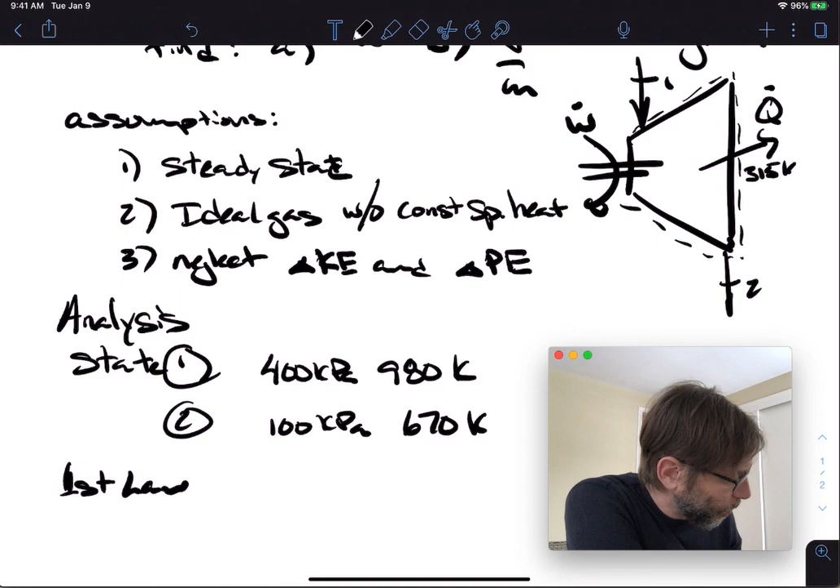Okay, so the first law looks like this: 0 equals big Q dot minus W dot plus M dot times H1 minus H2. Now simplified, we end up getting, of course we want to do this all based on the mass, right, so we divide by M dot. Let's put this as W dot over CV as big W, and I'll make this little w, okay, so little w equals q plus H1 minus H2 because we divided by M dot.

So we divided by M dot and that's what we got, okay, because Q dot divided by M dot is little q, and big W dot divided by M dot is little w. Okay, so let's use table A22.

For air, we use table A22 for air, and we get H1 equals 1023.25 kilojoules per kilogram, and S1 naught is equal to 2.9447 kilojoules per kilogram K.

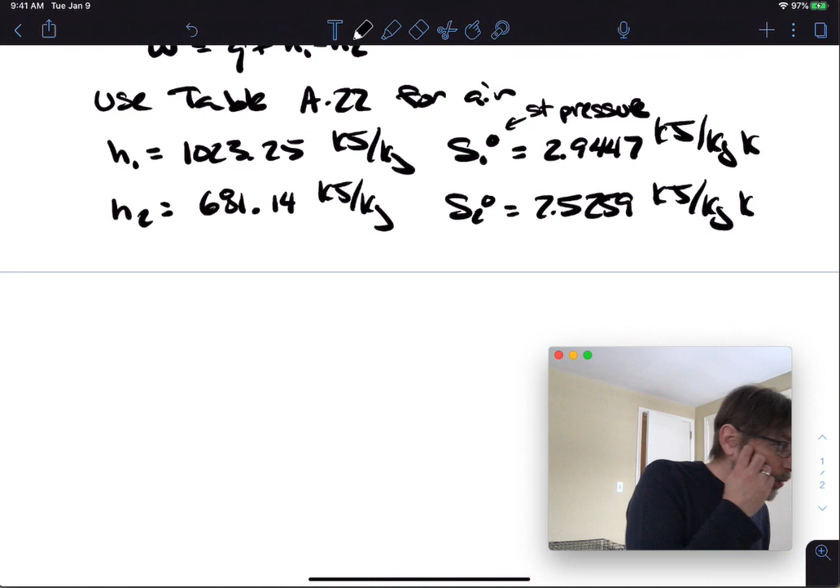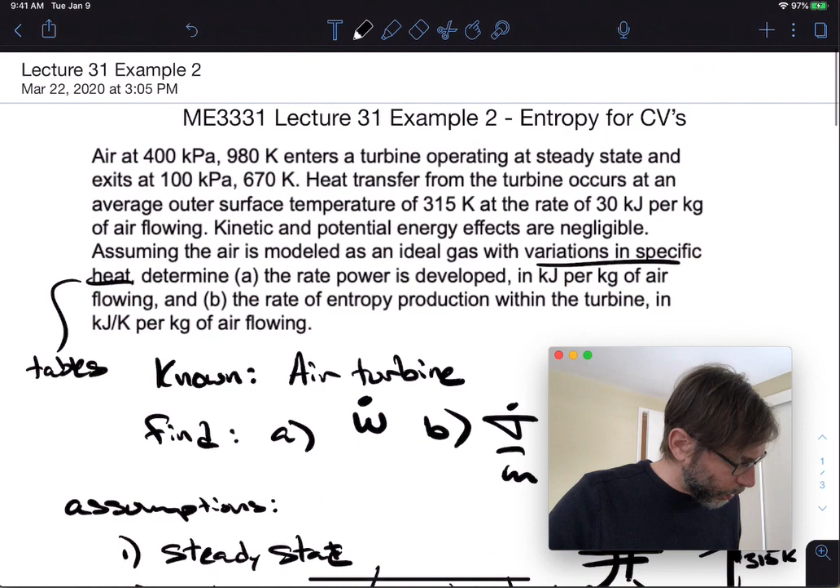Okay, now we have to do the pressure correction with it. So then we substitute, and we end up getting little w equals negative 30 kilojoules per kilogram, because that's what we had for the heat. So work equals the heat, and it's heat out of the system, so it's negative, plus 1023.25 minus 681.14, which equals 312.11.

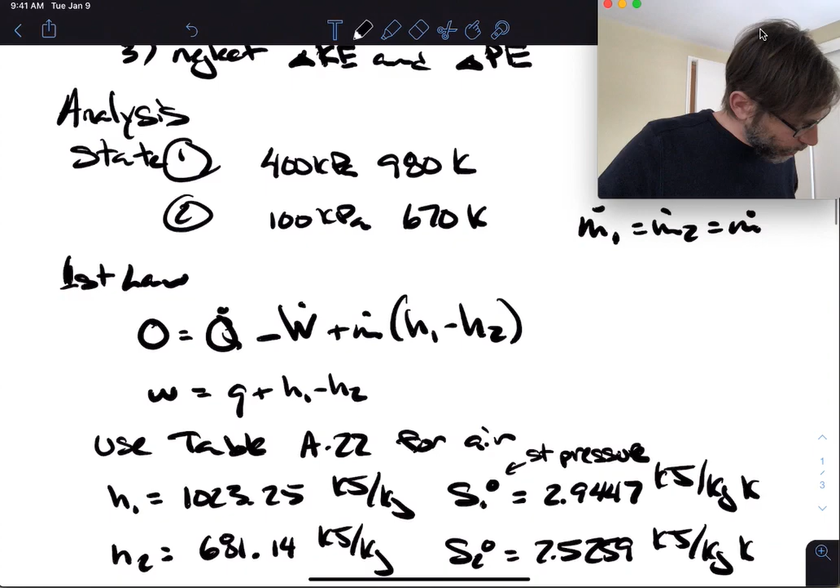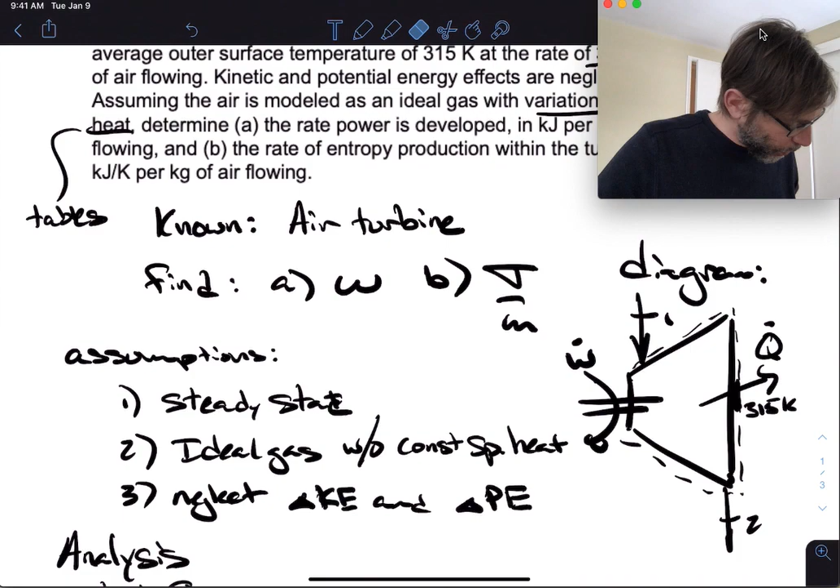Kilojoules per kilogram of air flowing. So I guess they really want us to find here, the little w and sigma dot over m. So then we have the work. Was that one of our answers? We had to find the power developed. Yes, okay, so this is the power per unit mass.

So part B is now to find the entropy production. The entropy rate balance is like this. Second law gives us 0, because ds/dt is 0, since it's a steady state process. You just got to remember that. Equals q dot cv over T at the boundary, which is 315, as we said, plus m dot times s1 minus s2, plus sigma dot. So we want sigma dot over m dot.

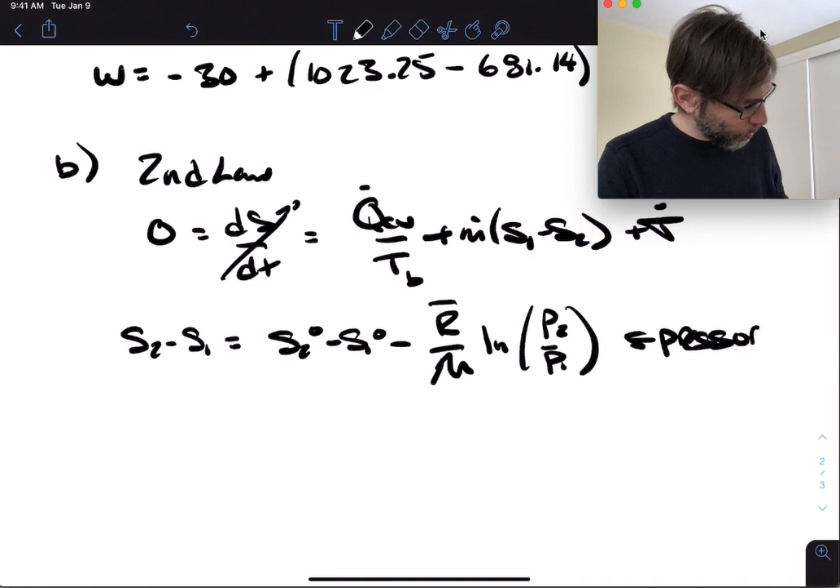So what we're going to do is divide everything through, but we want to find s1 minus s2. So s2 minus s1 equals s2 naught minus s1 naught minus r bar over big M, the molecular weight of air, times the natural log of P2 over P1. So this is the pressure correction we've talked about for an ideal gas.

Okay, so if we think we have everything we need here, we'll just put it in. So what we need is sigma dot over m dot, equals minus q, I'm going to write it as q over Tb, because that's the only heat transfer occurring over the control surface, plus s2 naught minus s1 naught minus r bar over M, natural log of P2 over P1.

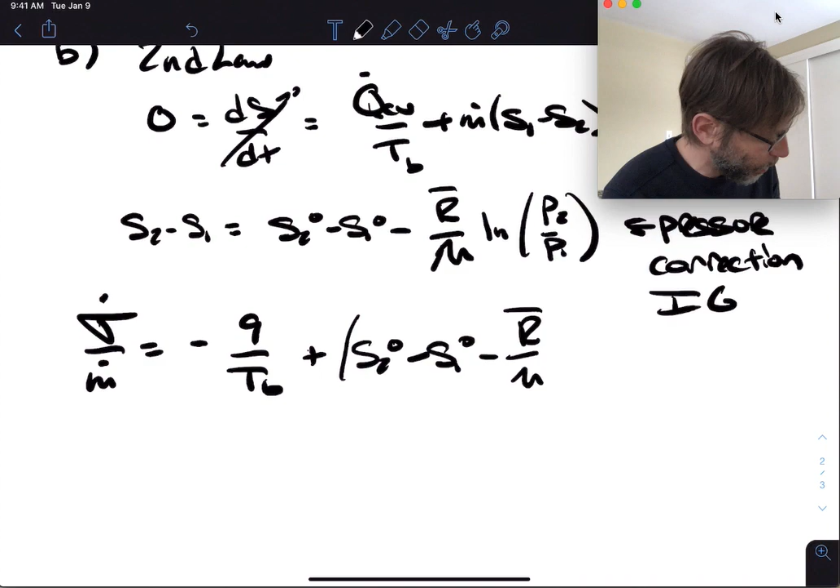And that gets us to the final answer we want, which is minus 30 over 315, the heat transfer leaving the system, plus 2.5259 minus 2.9447, which is s1, minus 8.314 divided by 28.97, the molecular weight of air, times the natural log of the pressure ratio, which is 100 divided by 400.

Okay, so now let's see, do I have everything I need? Actually, put parentheses here. Okay, so anyways, we get this solved, and we end up getting 0.074 kilojoules per kilogram K for the entropy, so that's sigma dot over m dot. And that is the answer, I think, because we're assuming variable specific heat, so we look these up in the tables. And we end up getting the final answer, so yes, it's positive, so there are irreversibilities.

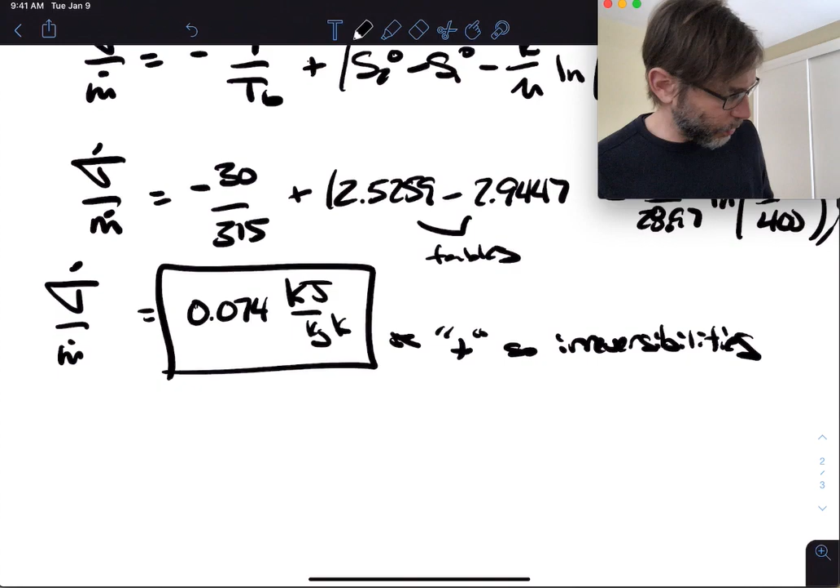Okay, so hopefully that gives you an idea how to do these control volume problems. It's pretty easy, all you have is an entropy in and entropy out term that you need to account for. For steady state, the ds term goes to 0, whereas for a thermodynamic system, the ds term is what you're solving for, and the in and out is 0. So that's the only difference here.